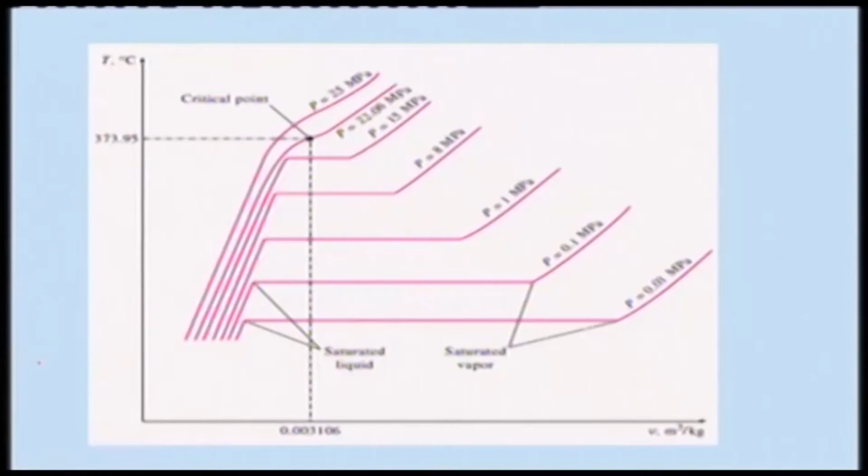So, let us say this is my 0.01 megapascal pressure, and this is almost atmospheric pressure, 0.1 megapascal approximately. I need to give this heat here, and this I call the wet mixture. Wet mixture means a combination of the vapor and its liquid. But if you look, this length goes on decreasing, and what is its implication?

Its implication is that the amount of heat I will be giving at the lower pressure will be much higher as compared to the latent heat I will be giving at the higher pressure, because this is the latent heat portion, where temperature remains constant, however you are adding heat to your water. Am I right? So, that latent heat goes on decreasing and it becomes 0 at what? At the critical point, right.

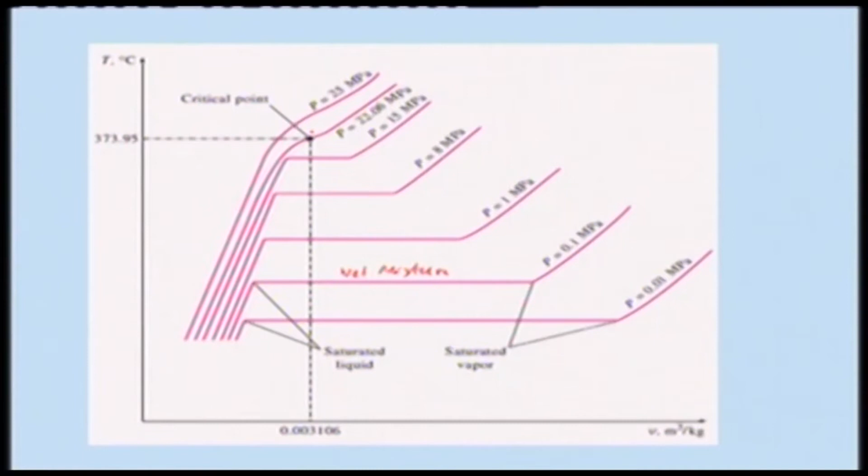That you should keep in mind. I did not emphasize this point in the last lecture, so let me emphasize again, this is a very important point, right. And as I told in the last lecture, a lot of efforts are going on, and people have already developed supercritical boilers, which are very efficient as compared to wet mixture or steam boilers, right.

So, now coming back to that, we will dwell a little bit upon the consequence of saturation pressure and temperature, right. Let me just tell you that the saturated temperature will be dependent on pressure and vice versa, right. So, can I use this for producing ice, or cooling, and how can we do it?

What I will do, I can go on reducing the pressure, right. If I go on reducing the pressure from 100 kPa, almost atmospheric pressure, what will happen? Temperature will remain constant, right. But after that, when I am reducing the pressure, it starts lowering the temperature, and at 0.61 kilopascal it will attain 0 degrees Celsius, and you can get ice being formed.

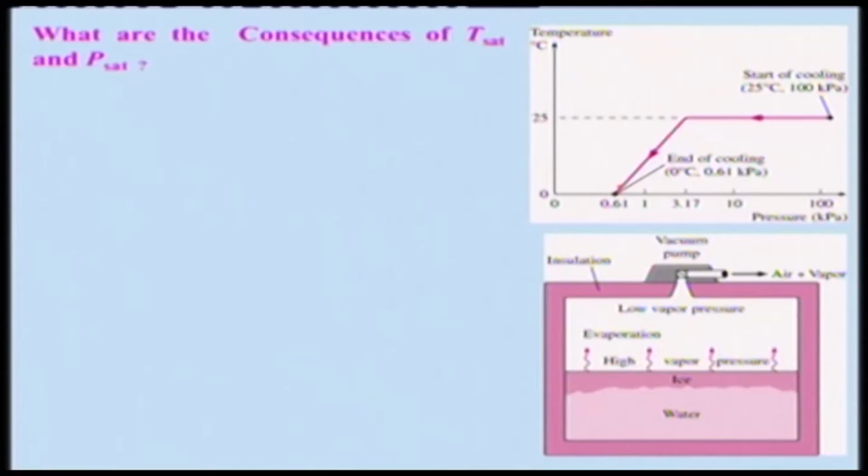And this kind of cooling is known as vacuum cooling, right. And let me tell you, it is quite costlier than other refrigeration and wet cooling. However, it is very important for preservation of certain kinds of foods, particularly vegetables which have a higher surface area per unit mass, let us say lettuce or spinach, right.

So, those can be cooled very easily, whereas if you put tomatoes, cucumber, or any other kind of vegetable which has lower surface area per unit mass, then it will spoil. So, therefore, this has a lot of applications, particularly in the food processing industries and other places, but it is a very costly affair to do that.

And this was done a long time back by Dr. William Cullen in 1775, and he made some ice by evacuating the air space in a water tank. I do dabble in ancient Indian science and technology, and I also learned that people in this country were making ice without refrigeration systems. How they were making it was an interesting thing. If some of you are interested, I can discuss that later on.

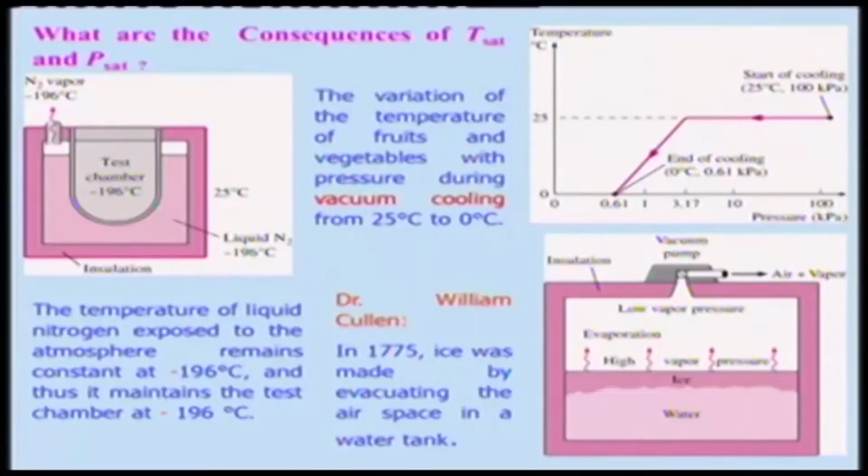So, there are several consequences of the saturated relations between the saturated temperature and pressure one can think of; that depends on your imagination. I have just given you a few glimpses of it. So, what we had done till now is that we looked at the temperature and the volume

keeping the pressure constant. Now, we will look at a situation where we will consider again the piston and cylinder arrangement, where we will take water at 1 megapascal and 150 degrees Celsius. This is our system, and it is already loaded with tiny weights. If I remove this small weight, what will happen to this water which is at 150 degrees Celsius, at 1 megapascal? What will happen?

If I remove this weight, the pressure will be decreasing, right. If the pressure decreases, what will happen to the specific volume? It will change, right. It will basically be increasing, and also there will be a decrease in the temperature. Am I right? There will be a slight decrease, but I want to keep the temperature constant, because now we will be considering the isothermal process, right.

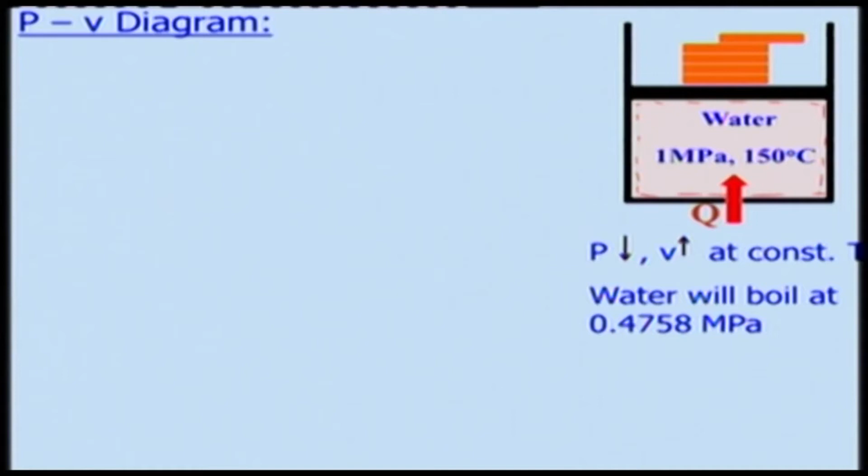What will we do? We will have to give some heat. That means I will have to supply a certain amount of heat to the water, so the temperature will remain constant. In this case, what is happening? The pressure is changing, and so also the volume. So, if you go on doing that, what will happen? The pressure was 1 megapascal earlier, but as you go on removing these weights, the pressure will be decreasing.

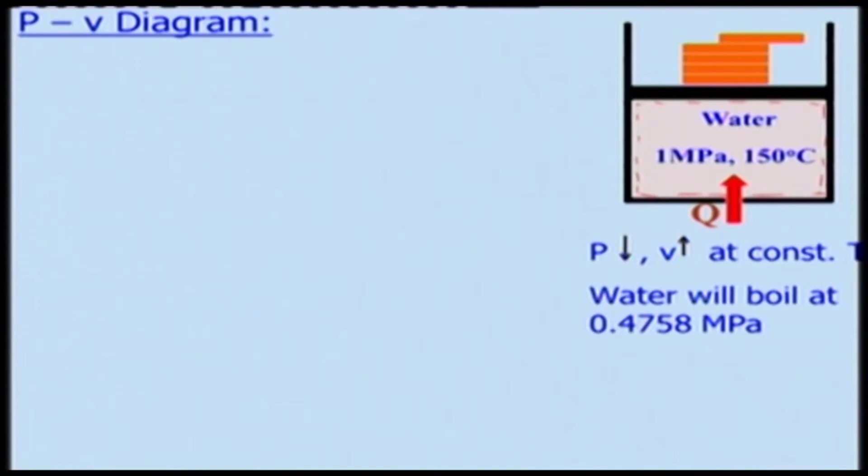If it attains 0.4758 megapascals, which is around 4.75 times atmospheric pressure, at that time the water will start boiling, right. Okay. And if it starts boiling, then what will happen to its pressure? Will it be decreasing further, or will it remain constant? What will happen?

Once it starts boiling, the temperature will remain constant, and so also the pressure, right. Yes or no? Because if you look at the T-v diagram, when the pressure is constant, the temperature remains constant when it starts boiling, right. So, let us say I am here at a pressure of 1 megapascal at this point, and as we go on decreasing the pressure, there is a change in specific volume, but the specific volume change is very, very small.

So, for example, if I look at here and at some point here, this change is very, very small, right. And this point is what I call the saturated point, the saturated liquid point, and at this point what will happen? Water will start boiling, and after that this will be the liquid and vapor region, where the pressure remains constant, and already this is an isothermal process we are considering. So, temperature remains constant, but there will be a rapid change in the specific volume from this point

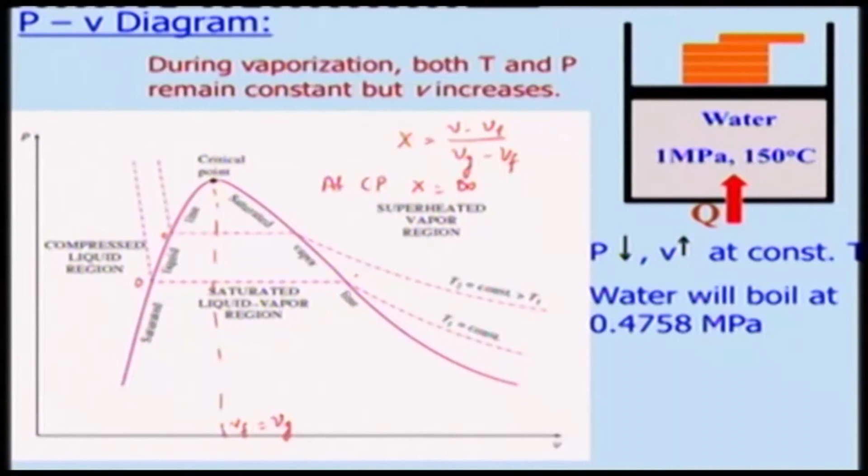So let us now look at a constant volume process for a pure substance. For example, if I take a certain amount of liquid and a certain amount of gas, here the liquid is the larger quantity and the gas is the smaller quantity. What is the meaning of this? In terms of X, will X be closer to 0 or 1? It will be closer to 0. It cannot be 0, it will definitely be greater than 0, so it will be a small value, let us say 0.1 or 0.2.

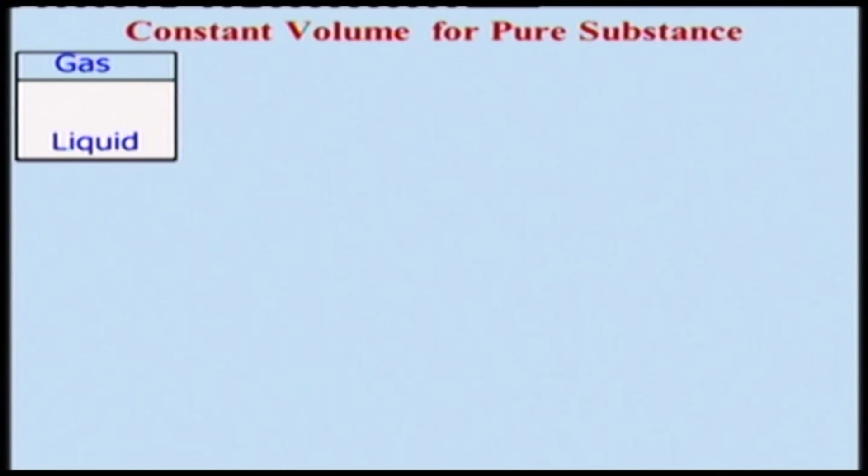And if I go on heating this, what will happen? Will liquid be converted into gas, or gas into liquid? It can happen because we are considering two phases only. So what will happen to the wet mixture, and to the quality? For that we will have to look at

either the PV diagram or the TV diagram, where it is very clear. For example, let us say I am at this point. If I am heating at constant volume, I am moving in this direction. If I am heating, the pressure will go up, I will go in this direction, and at a certain point I will get all vapor.

Similarly, the other way around, with very little liquid and more gas, you are in this region, and you are again going up as you give heat, so you will basically get vapor. But I can think of another condition in between, where you start with this mixture here and go on; there will be wet mixtures, and the X value will be changing.

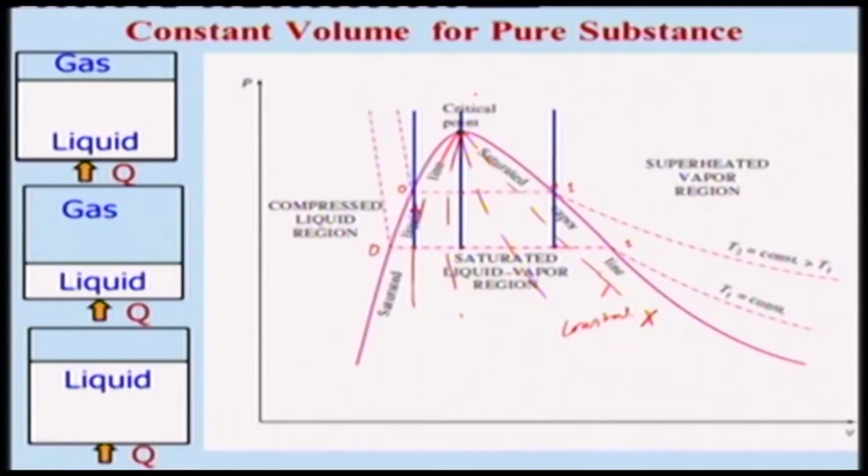So, therefore, if I draw these curves here like that, what are these lines? These lines correspond to constant x, quality lines. So it will be something like 0.1, then 0.2, maybe 0.3, like that it goes on. So if I am going this way, my quality is changing, quality is going towards 0, right. Similarly here.

So, let us now look at other aspects. Till now we have looked at two phases, one is liquid and the other is vapor. Now we will consider ice at minus 20 degrees Celsius and 0.1 megapascals in a piston cylinder arrangement, so that we can keep our pressure constant, or it can be varied very easily. So I can have control over the system. If I go on adding heat, what will happen to this ice?

What will happen? What happens to the ice temperature? It will go on increasing, that is obvious, right. And as a result the volume increases slightly. Will the volume increase or not? What will happen? Because if it is ice, and if it is converted into liquid, then for the same mass, what will happen to the volume?

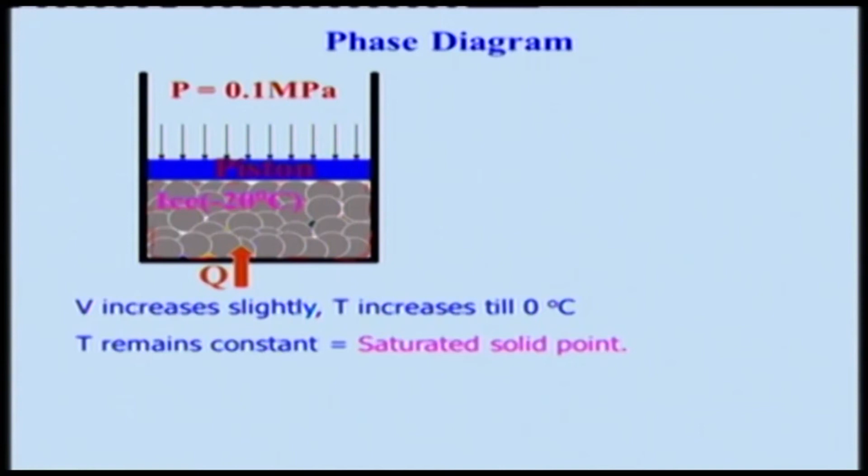I think you are not thinking. Please think about it: if ice is converted into liquid, what will happen to its volume for the same mass? Volume decreases. Okay. So the temperature goes on increasing and ice will start melting at 0 degrees Celsius, and at melting, the specific volume of the water is less than that of ice. So what will happen? The ice will be floating, right, and the water will be down.

This is the beautiful thing, the speciality about water. Whatever living things we see are because of these properties of water. In other words, if you believe there was an ice age and after that all melted, imagine it had been another material, like most materials except water, for which the specific volume of its liquid is less than that of the solid.

That means for all other matter it is the other way around: the specific volume of the liquid is greater than that of the solid, so the solid has higher density than the liquid. Imagine that had happened for water. Ice would have been on the bottom of the lake or sea. Then what could have happened to the living beings? There are a lot of living beings beneath the sea that could have died or not been there.

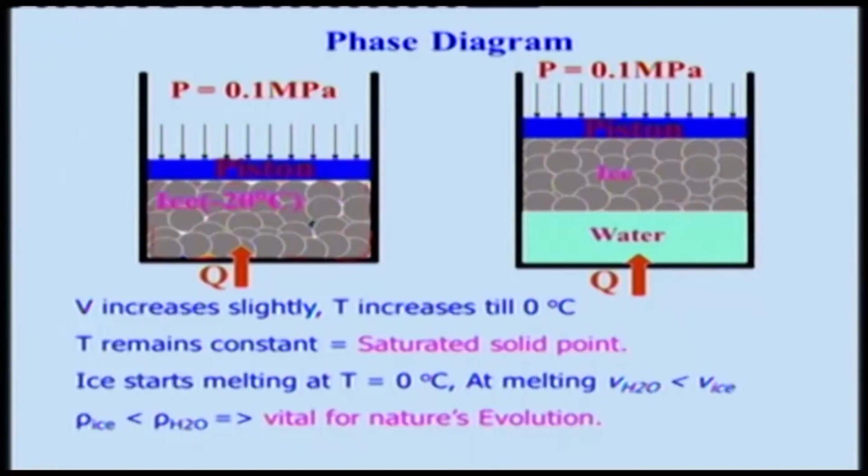So, coming back, that is the beauty which has created life on this beautiful earth because of the properties of water, the speciality of water. That is vital for nature's evolution. This is a very important point; otherwise we could not have been here talking about thermodynamics if we had not evolved. So, now let us look at another situation.

We will consider the same ice starting at minus 20 degrees Celsius, but we have changed the pressure here to 0.26 kPa, and I will go on adding heat. So, what will happen? The temperature definitely will go on increasing, but will it be converted into liquid or not?

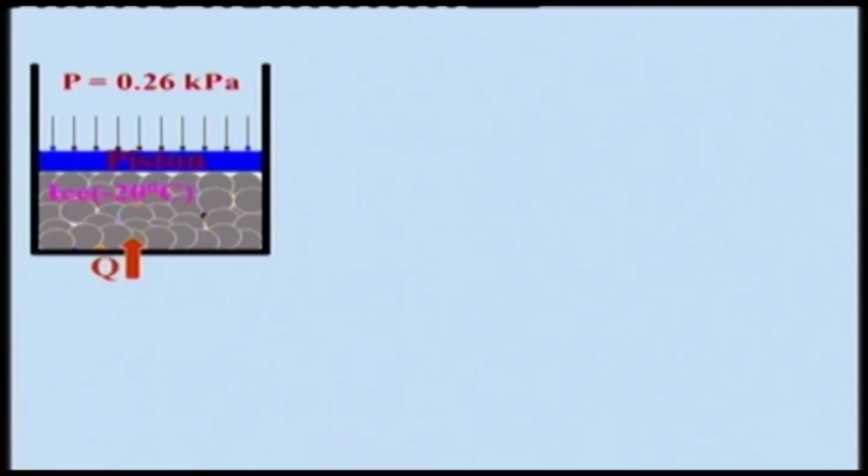What will happen? Because we have seen that when the pressure is 0.1 megapascals, and it was also at minus 20 degrees Celsius, we found that the temperature of ice will go on increasing, and when it reaches 0 degrees Celsius, it will be converted into water. But in this case it does not happen.

The temperature will go on increasing till it attains minus 10 degrees Celsius, and ice will be converted directly into vapor, what we call sublimation. This is a very interesting phenomenon which occurs for other pure substances also.

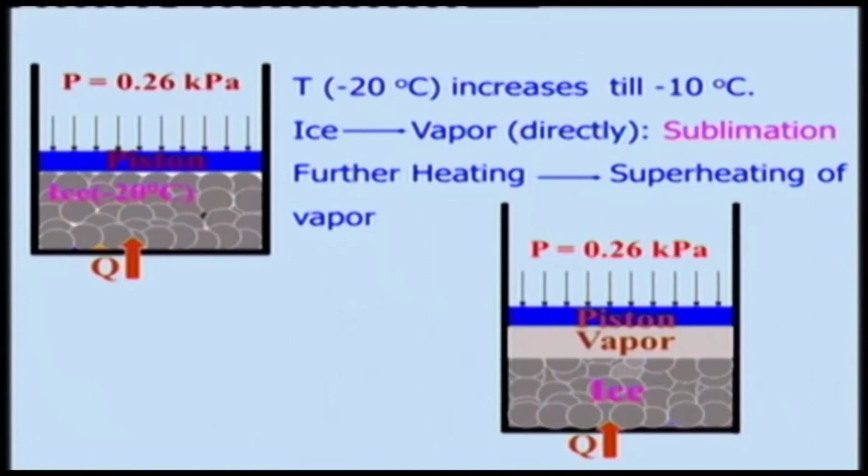If vapor has come and I go on adding heat, what will happen then? Of course, the ice will be converted directly into vapor. With further heating, first all the ice will be converted into vapor, then if you go on adding heat it will be converted into superheated vapor.

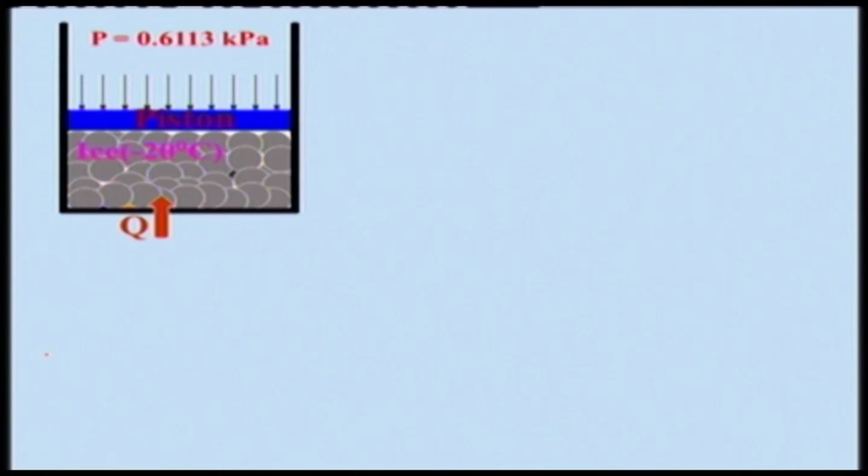So, let us consider another situation. Again we will start with ice at minus 20 degrees Celsius, but the pressure we have changed to 0.6113 kilopascal. Then if I go on adding heat, what will happen? In all this process we are trying to keep the pressure constant. So, what will happen to the ice?

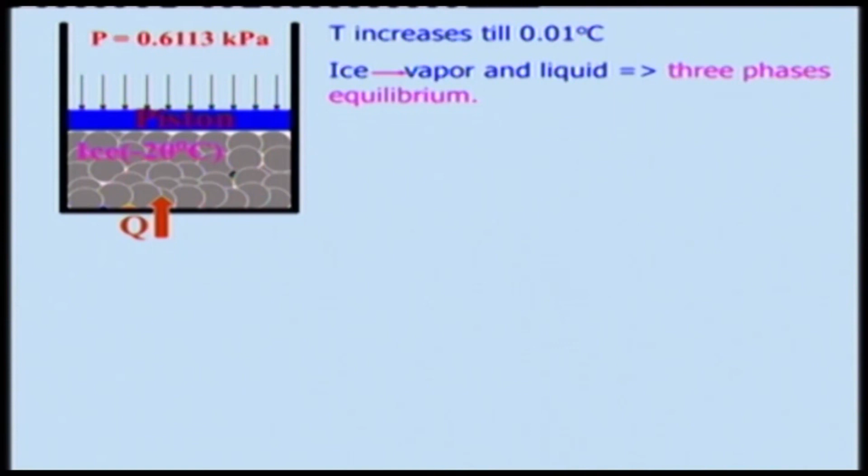Just now we saw that the ice was converted directly into vapor. Earlier we have seen ice converted into liquid when the pressure is changing. Of course, the temperature of the ice will go on increasing till it attains 0.01 degree Celsius, and ice will be converted into vapor and liquid state, and this we call the 3-phase equilibrium. That means all 3 phases will be simultaneously present at the same point.

So, this is a very important point. I had emphasized in the last lectures that this triple point was being used as a reference point for temperature measurements, the temperature scale, because it is invariable. If there is a small change in that temperature, then you will not get 3 phases immediately. So, therefore, to get a very precise reference point, this is internationally accepted.

As I told, all 3 phases will remain at this point, and this is called 3-phase equilibrium. 3 phases are in equilibrium at the triple point. And let me emphasize also that no thermodynamic property of the system can be varied independently at this triple point. This is a very important point you should keep in mind.

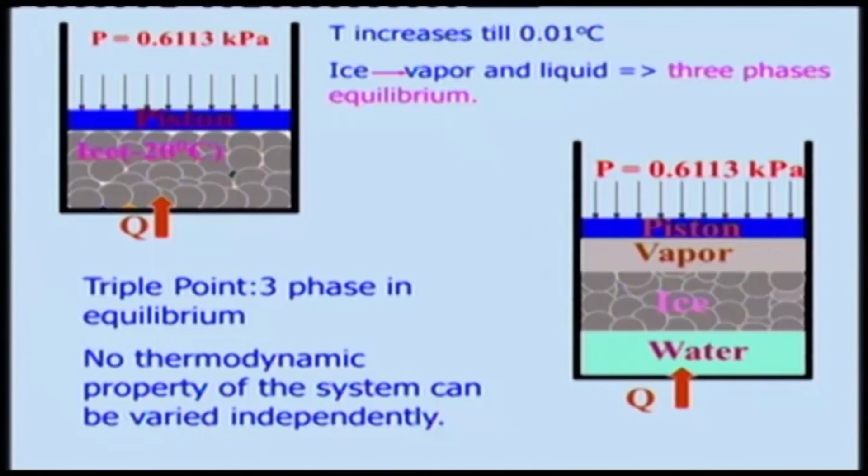And we will stop over here. We have seen these changes, and we will be discussing in the next lecture the phase diagram, because we have looked at the various phases with the pressure-volume diagram while keeping temperature constant, and the temperature-volume diagram while keeping pressure constant. But we have to look at a diagram giving all 3 phases; only then we call it a phase diagram.

Now, let me ask a question before we stop: I have 3 variables in this case, pressure, temperature and volume. What should I plot so that I get all 3 phases together? We will stop with this question and continue with this phase change process in the next lecture.